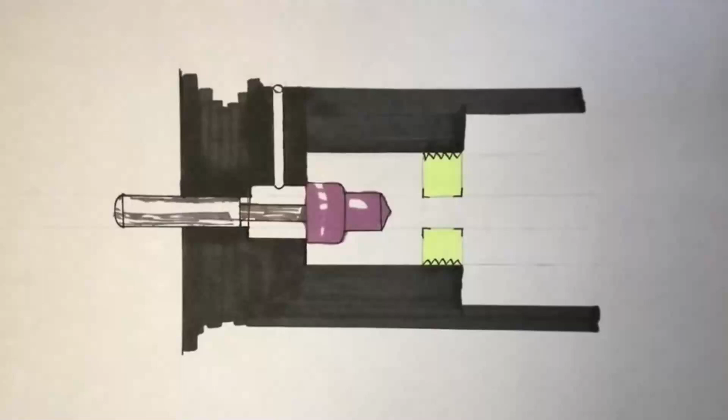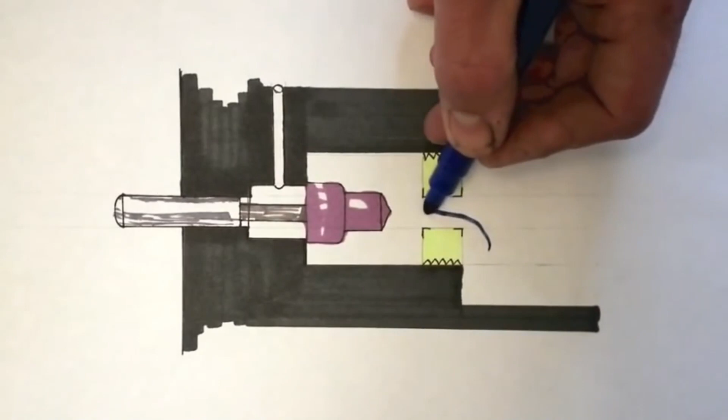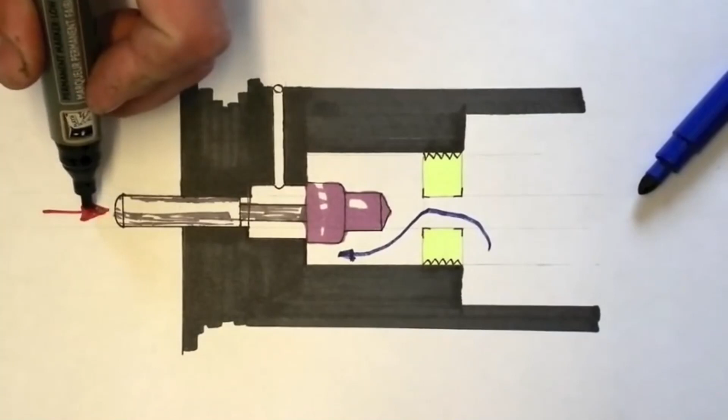On the majority of PCP air rifles, the air enters from the main air reservoir into the outlet valve through a central hole. Then, when the hammer strikes the end of the outlet valve, it simply knocks the valve open and does nothing more than that, letting the air flow around it and up and out of the transfer port. This is a very simple system.

Now, for the majority of you, this will not cause any problems at all. However, I've now had a number of cases where people have tried to run the regulator at a very low pressure without making other alterations, and this has caused a serious issue.

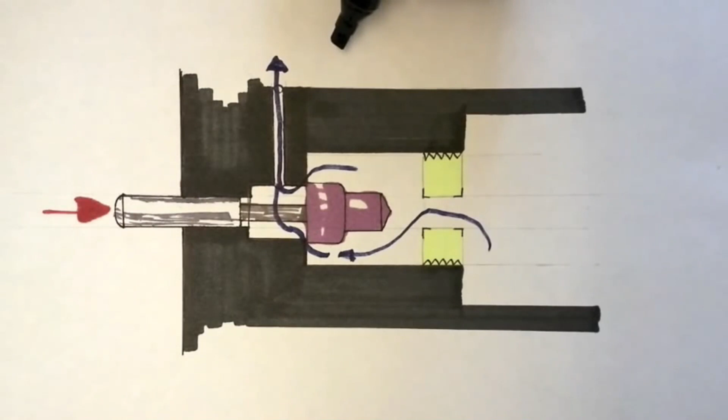This starts when someone thinks that they're going to run their gun at, say, 70 or 80 bar, and that they don't want to enlarge the transfer port. This isn't possible, because if you've got a hole this big, you can only get so much air through it. If you've got a hole that big, you can get a hell of a lot more through. So if you're running your regulator at only 80 bar or below, you need an enlarged transfer port.

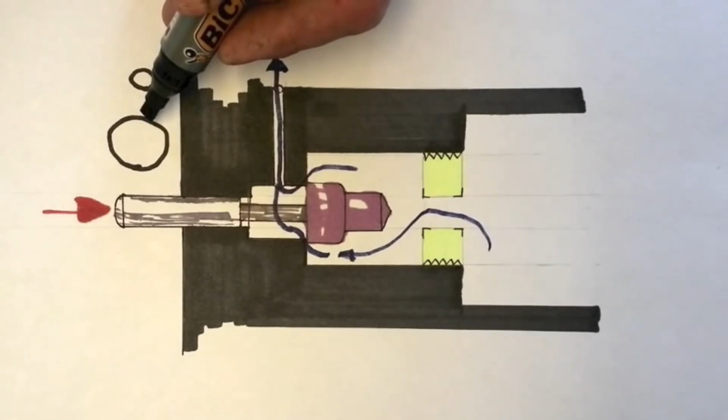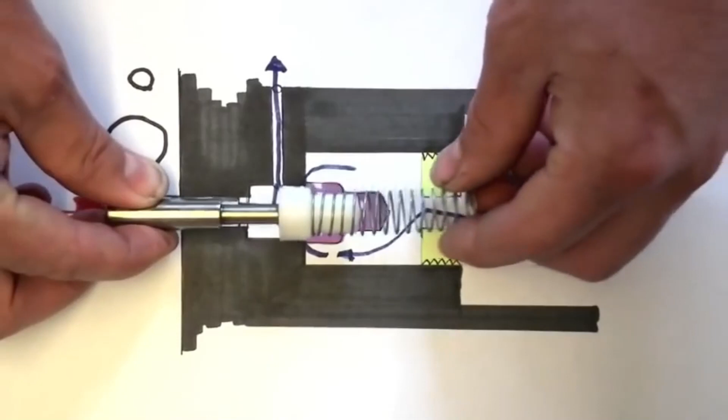Now, these people haven't realised this and decided to stick with the original small port. So what has happened is - and here's one I made earlier - there is your outlet valve.

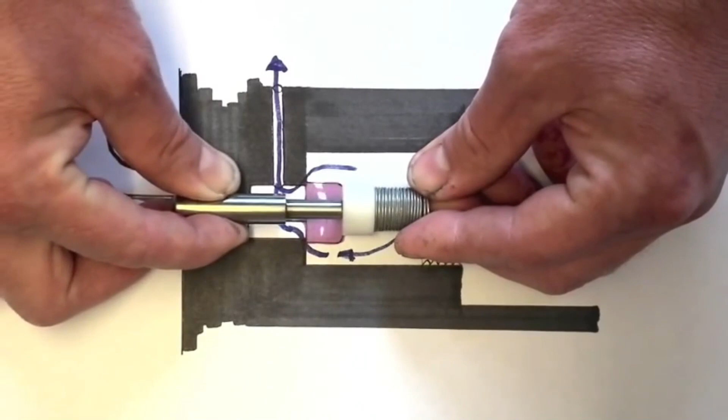To try and get the power up, because they can't get anywhere near what they want, they make the hammer hit the end of the valve harder and harder and harder, and obviously it has no increase at all for two reasons. One, because the transfer port's not big enough, and secondly, as you'll see, as the valve opens further and further, the gaps between the coils of the spring close up, so more air cannot pass through the valve because you're shutting the hole it's coming through, and this hole just becomes completely closed off. So by increasing the hammer force, you think you're going to knock the valve open and get more air coming through, but you're doing exactly the opposite.

You're getting the valve knocked open and it's closing the hole from the main air reservoir chamber. So if you're going to run your regulator at a low pressure, it is absolutely vital that you increase the size of the transfer port.

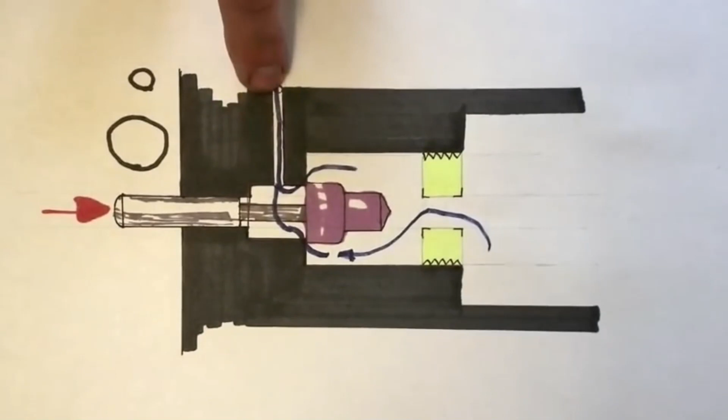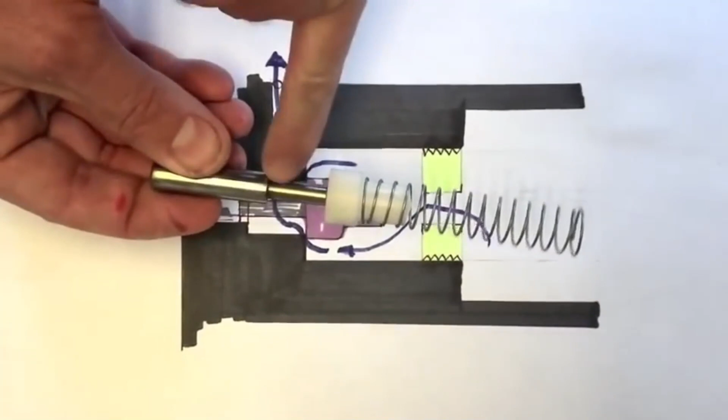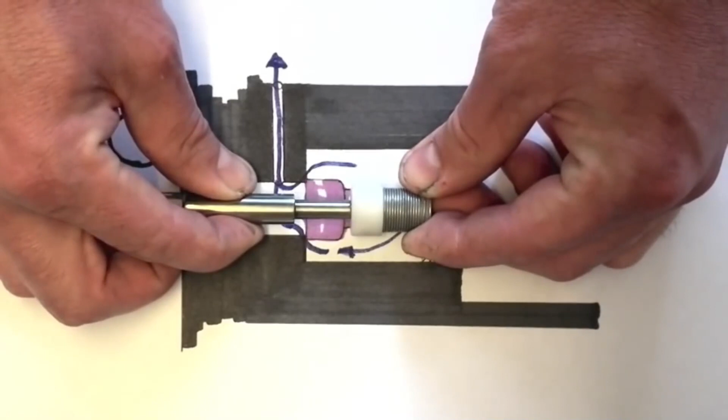In the worst case scenario, if someone screws the hammer up that hard - especially, this is obviously a model I've made up for this video, but some valve stems are made thinner in the middle like this - in cases like that, people have screwed it up so much that when it's hit home and stopped dead, you've ended up bending the valve stem, and then when it comes back it doesn't sit down and it just leaks.

So please, if we've told you that you need to enlarge the transfer port to a bigger size because you're running your regulator at a low pressure, this is definitely something you need to do to avoid damaging the valve assembly.

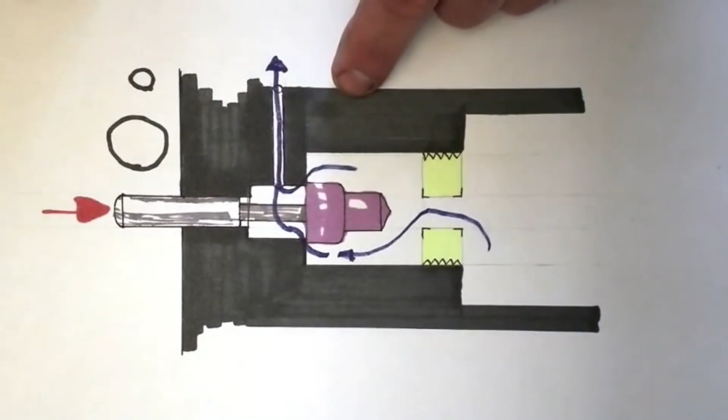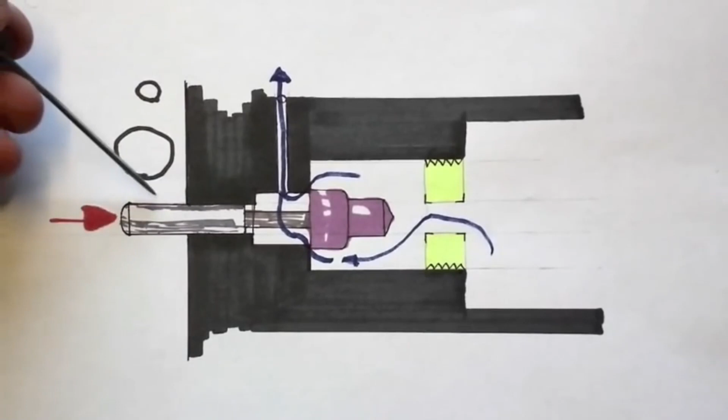Before I end this video, I ought to point out that this has only happened on 2 or 3 occasions in the last couple of years, and it has also only happened as a result of the customer, for some reason, doing other modifications to his airgun, such as fitting an extra long valve stem which sticks out further than the normal stem.

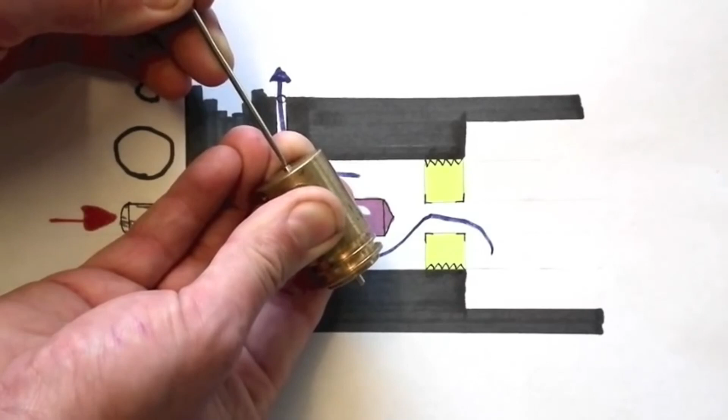On most air guns, when the hammer hits the end of the valve stem, you could actually push the valve stem in further than the hammer can possibly travel by a few millimeters, so this is only ever liable to happen if you've fitted an extra long stem, because in most cases the metalwork of the valve housing would come to just here, and the valve stem only sticks out a few millimeters.

So unless you've decided to fit a valve stem that comes all the way out here for some reason, then there isn't much chance of this happening to you.

But just let it be a warning that if you or any of your friends want to fit the regulator at a low pressure to try and get as many shots as possible, then please make sure that you definitely enlarge the transfer port.